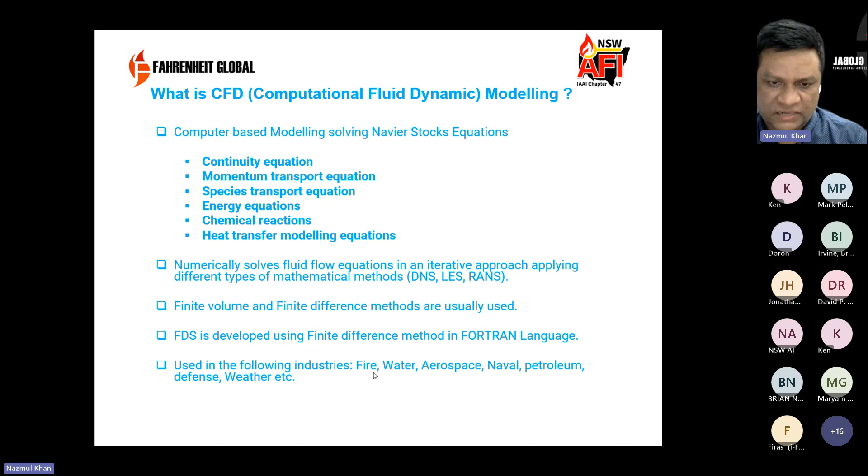Recent rulings regarding the use of computer fire modeling - I think you guys probably know that there are controversies. Some people are happy to use computer fire modeling, and some are not. They argue different types and raise different questions about accuracy and other things.

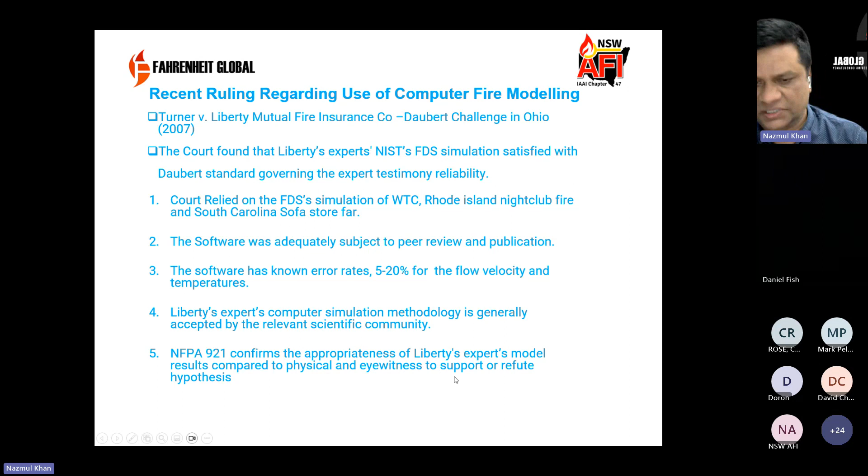Origin of fire is one of the important areas that I believe whenever we are going for an investigation of a fire. As NFPA 921 confirms, we need to find the area of origin before the cause can be properly evaluated.

In this model, Gregory is a full-time professor and professional fire and explosion analyst. He studied both experimental and simulation approaches.

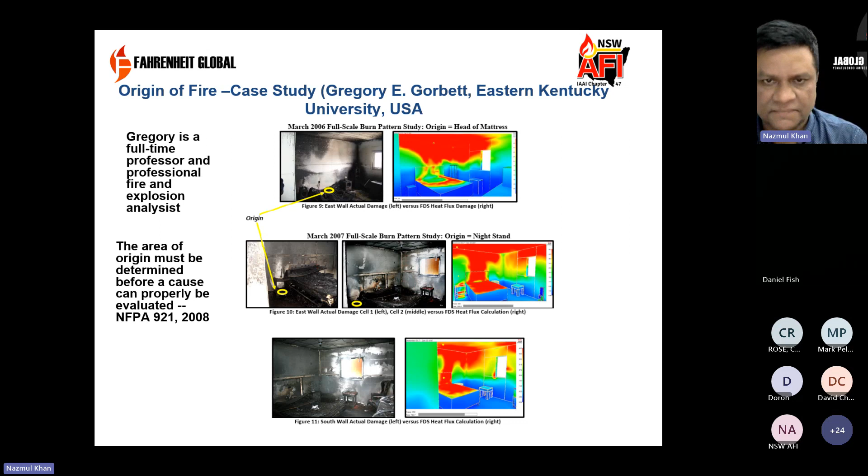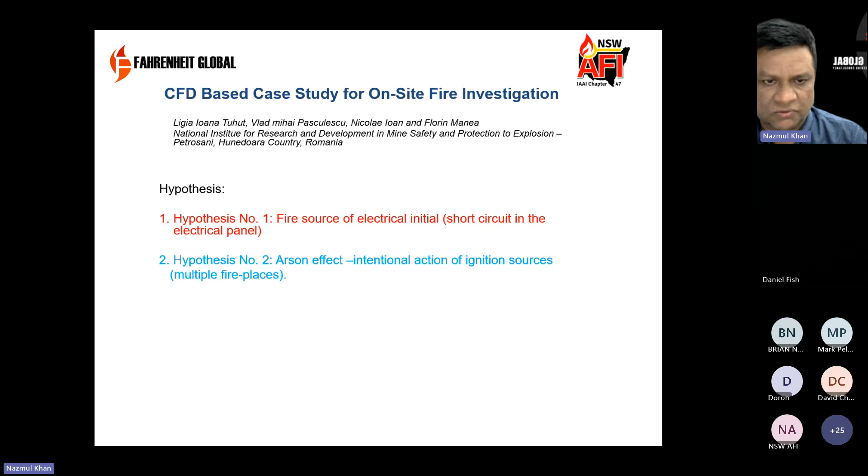Another case study I want to present as a hypothesis: one hypothesis is fire sourced from electrical initiation, or fire initiated from arson, meaning intentional ignition with multiple fire places. Let's see how it looks.

These figures are taken from a journal article showing electrical initiation of fire. The fire is initiated through the attic interior, and subsequently, as shown in A, B, C, D, we see the progress of the fire's growth and spread, ultimately reaching the final figures. This area did not actually spread further, as the fire spread in the middle of the area. This is the scenario based on electrical initiation of fire.

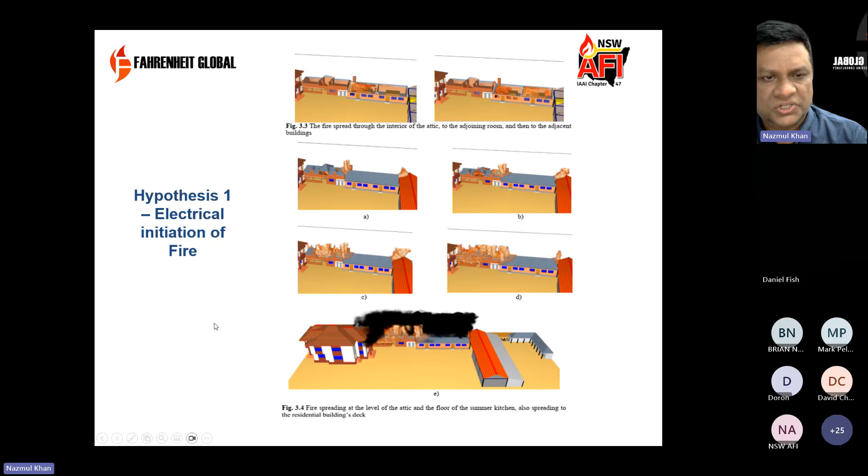Let's see another scenario with arson initiation. Arson usually uses an accelerant, like liquid phase fuels. Here we see multiple outbreaks due to deliberate burning of combustible walls from these regions, and the lighting of the wooden wall of the annex, from which the fire is originating.

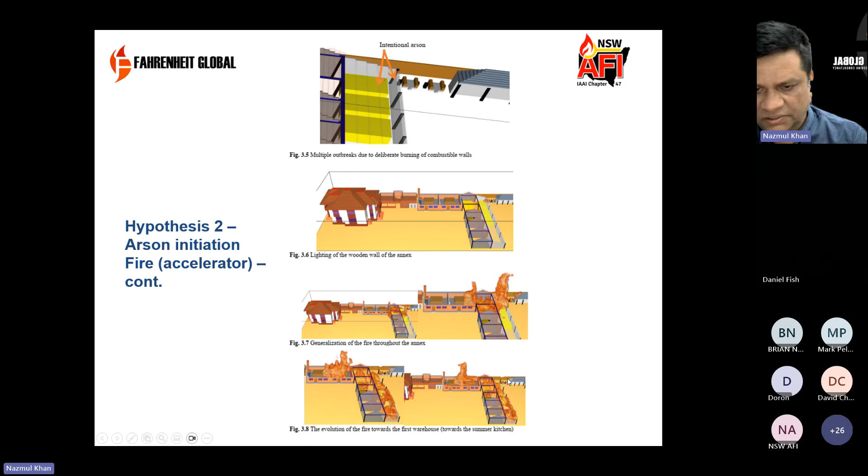We can see the generalization of the fire throughout the annex, progressing to the left side area. In this figure we see it continue, and finally the fire spreads over these areas, up to the annex, causing damage to the workshop and storage spaces of that area. Here we see the final scenario for that fire.

In the real fire, it was found that the damage looked similar to that scenario, so we can generally assume it was likely due to arson initiation of fire. This is evidence from a real fire compared with the FDS simulations, which gives us believable tools so we can establish our hypothesis.

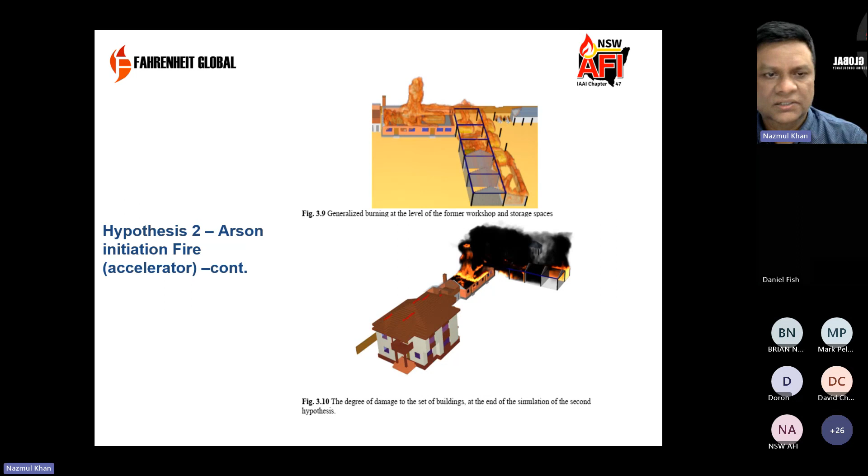CFD model in fire investigation. I've taken this from the NFPA 921 guide, which describes where we can use CFD-based fire modeling. Looking at the bullet points, where space and fuel configuration is irregular, mostly this applies to wildland fire or wildland urban interface, residential buildings near wildland or forest areas, bush-prone areas, something like this, but turbulence is a critical element.

Another point mentioned here: turbulence is very relevant to wildland fires, where very fine detail is sought, whether in big buildings, sensitive key areas of buildings, or even in wildland fires.

As I presented a bit earlier in previous slides about the World Trade Center collapse and Rhode Island nightclub fires, those fires indicate that they can be replicated by FDS.

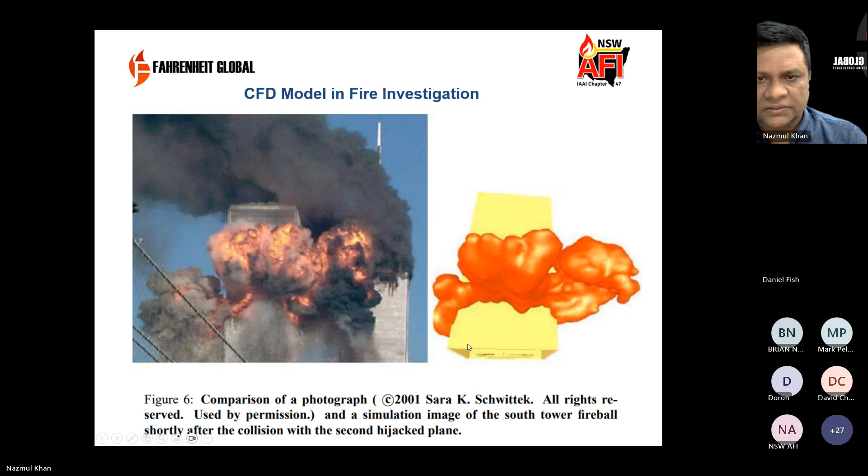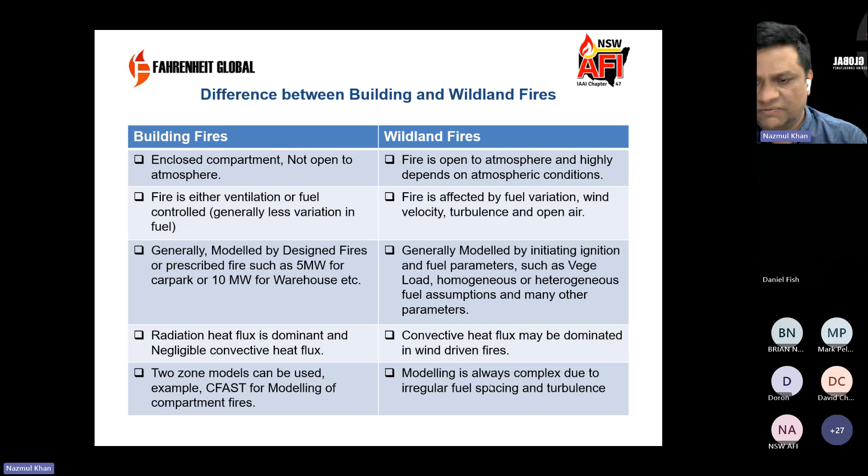Now I'm going to present my PhD work, not too much, only one slide. In my PhD at Sydney University, I did multi-phase modeling in OpenFOAM. Multi-phase means liquid phase and gas phase. Whenever we talk about multi-phase, we have to understand the plume, smoke or air is created as a gas phase, and liquid or solid, like timber or trees, is the solid phase. So modeling of this kind falls in the category of multi-phase. So in multi-phase modeling, we have to create both the gas phase and the other phases in the modeling.

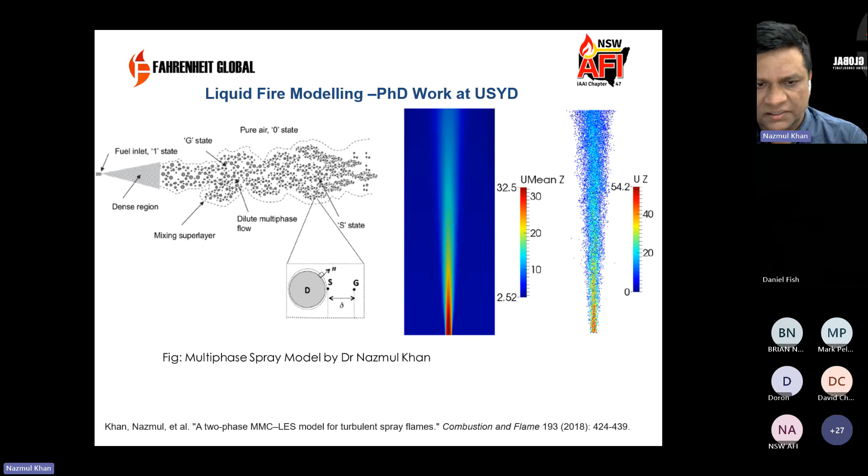Now I'm moving to the wildland fire modeling, where I did more than 4 years of work at Victoria University. It was a Bushfire CRC project initiated by Victoria University. In this presentation, I'm going to talk about grass fire modeling and also forest fire modeling. At Victoria University, we developed canopy modeling, which is a form of forest fire, and also the canopy with hills. This is not essentially the fire model, but as I said, open wildland fire is dictated by the wind flow. So when there is a hill and canopy, obviously the flow field is very complex, and that complex flow field dictates the fire rate.

Here is the grass fire model. Originally, the grass fire model was validated by Cheney et al. at CSIRO. The left side is the CSIRO experimental setup. The right side is our FDS model done at Victoria University. We can see the rate of spread is validated between the experiment and simulation. Very good. They match each other in terms of the rate of spread.

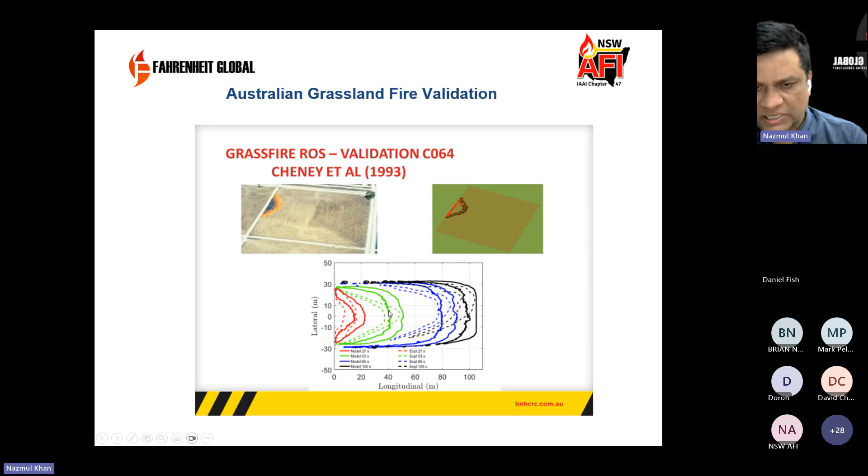Canopy modeling, as I said, canopy is a little bit hypothetical. Flow field, as you can see on the left side, there is a model, and there is a forest. Canopy model. So these equations use the leaf area indices. With the leaf area indices, we developed a tree profile, something like this. When there is airflow through the trees, there's a wind profile, something like this. So based on this, we call it the canopy drag model, which we developed at Victoria University.

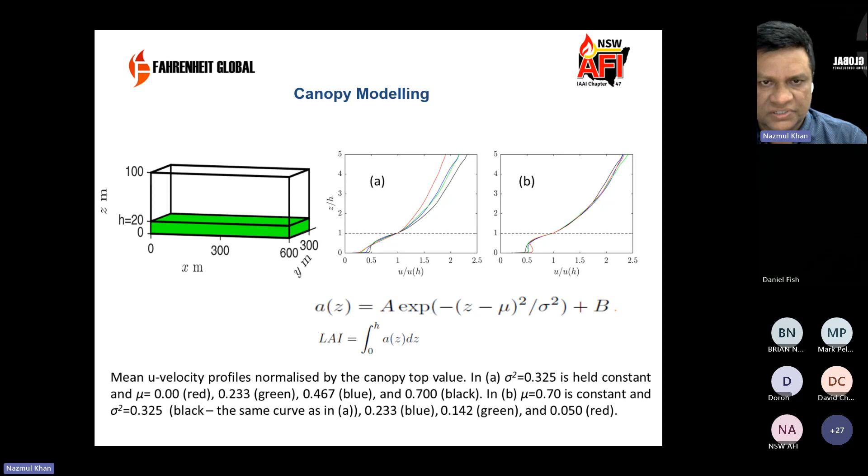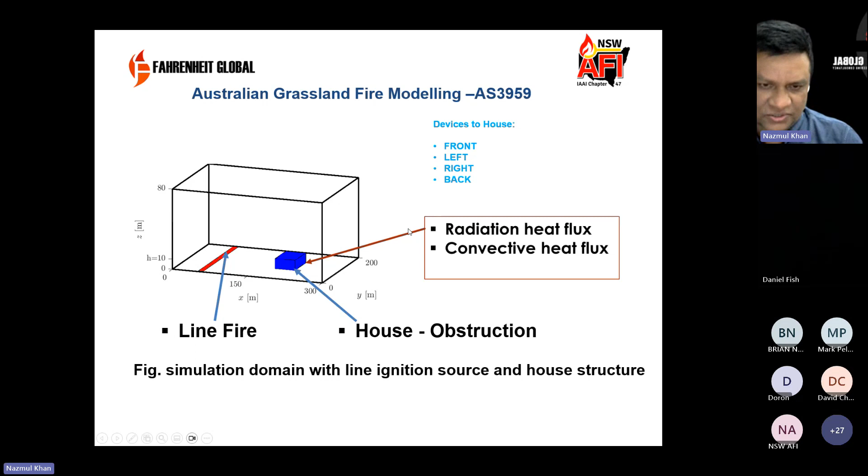Now I'm going to talk about AS3959, which is relevant to bushfire. As you can see in the model, as I said earlier, in wildland fire we usually initiate the fire by a line fire. There is a line fire here. The white area is grass. I'm not showing the grass here, but I'm showing the house as an obstruction. At the front, left, right, and back, we put some devices so that we can collect the radiation heat flux in FDS.

I'm showing one video which shows how the fire is moving. When the fire was initiated here, this is the ignition source. From the ignition, fire spreads to the surrounding grass, and the grass catches fire. With the wind velocity and combustible vegetation there, the fire is propagating. When it reaches just in front of the house, we measure how much radiation heat flux is received by the house, and we compared it with AS3959.

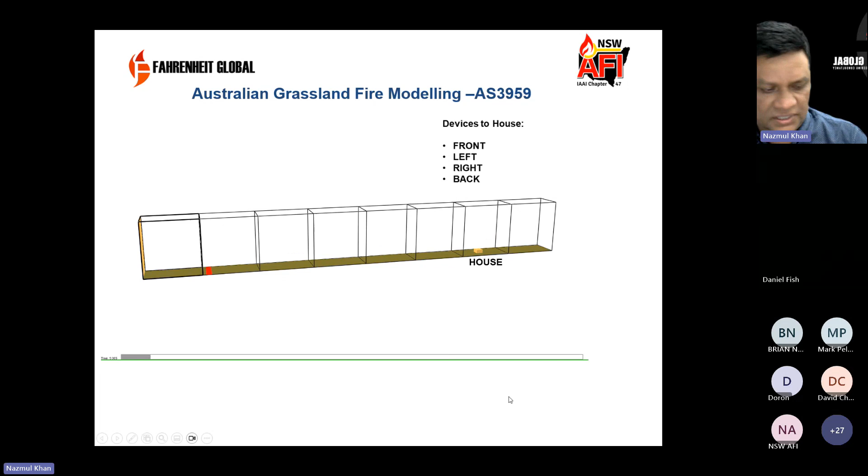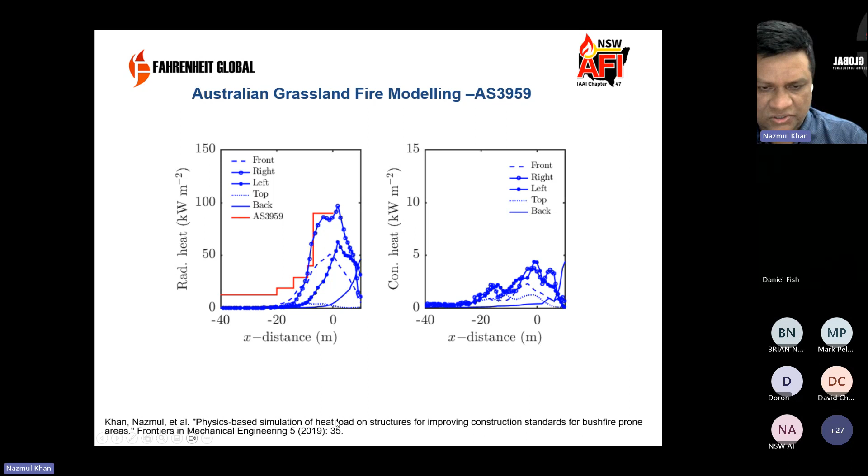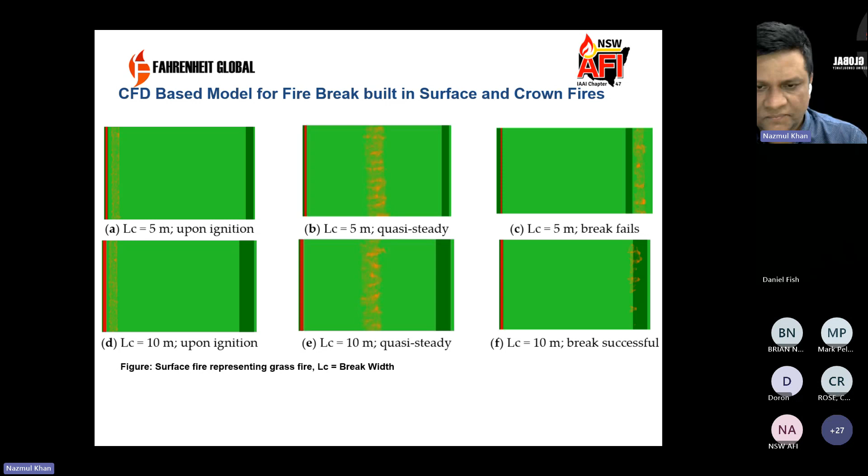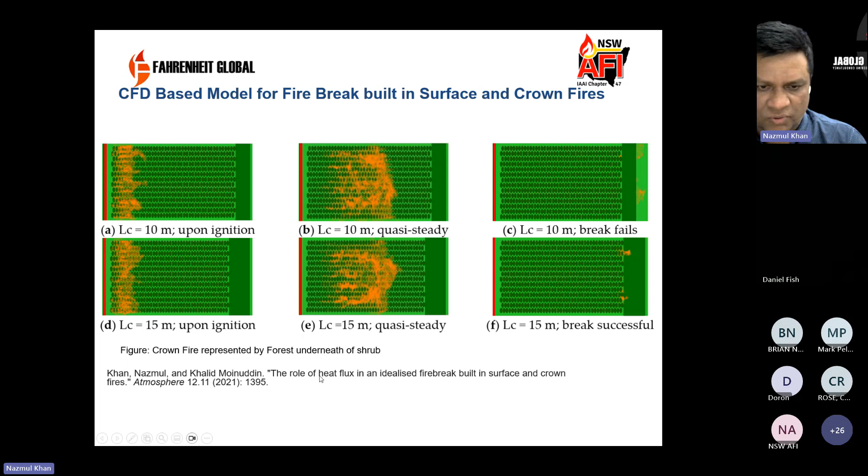This work was presented to the Australian and New Zealand fire agencies, and we wanted to show them how we can do the simulations and justify the fire break size in a forest area. It's like prescribed fire, probably you guys know about it. With the prescribed fire concept, we can clear some of the areas, even in the middle of the forest, to stop the spread of the fire. And we published one journal article. As you can see, it is open source. If anybody is interested, you can see there.

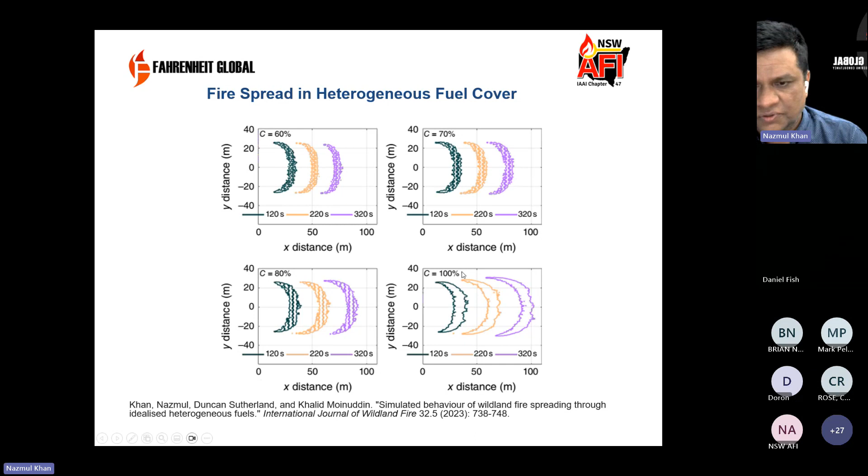Now I'm going to talk a little bit about FDS and some points if anyone is interested to work in FDS and do some simulations. As I have given the link, anybody can download FDS, and the installation is very simple. You just follow the link and you can easily install it on a Windows or Linux computer.

And there is a user guide. There is also a technical reference guide. You can easily follow them, and you can run the example cases if you want. It can be run in Windows and Linux. For Linux, usually we prefer big jobs in terms of the number of nodes. No extra cost for the open source software. But if you want to use the open source software, obviously you need some extra knowledge.

Otherwise, you have to use PyroSim, which comes with FDS inbuilt, and you can easily develop a CAD profile of a model and run simulations, but it is a subscription, a little bit costly, usually used in fire safety engineering consultancy. And open source, there is one option, Blender FDS, but I don't see it as very handy, but still it is possible in a graphical user interface.

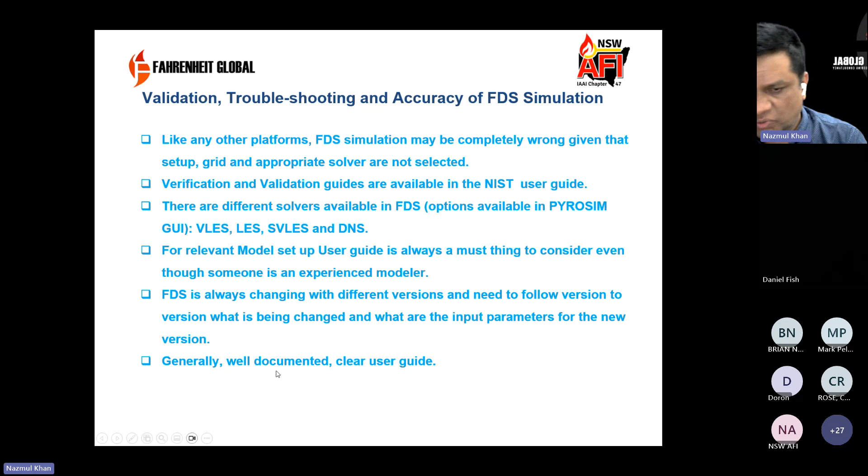Again, I should talk about some simulation results, how they are sensitive to other parameters. Generally, the grid resolution, the mesh we are using in the model, is very sensitive. Sometimes which solver I am using, atmospheric conditions, design fires, fuel-specific parameters, type of solver, all these are very influential in the simulation result.

We need to keep in mind, even though, for example, we don't do the simulations, we can hire a third party to do our simulation, but we need to understand the simulation results, and we need to understand where to put them and how to support our hypothesis.

Development of the wind profile is very complex in terms of wildland fire. There are different kinds of wind profiles, log profiles, synthetic eddy method, something like this. Numerical instability is another important thing. In modeling, numerical instability may come from different sources, maybe grid, maybe conditions, maybe fuel-specific parameters, and modelers must understand the causes of instability. There are many ways to handle, understand, and troubleshoot the problems.

And many parameters in FDS, the input parameters I'm talking about, for example ambient temperature, relative humidity, and solver, as I said, the default solver is VLES. So many things are actually default. We need to understand whenever we are running the simulations, are these default parameters applicable for my model? Are these parameters or hypotheses relevant to my work? These are the things we need to understand.

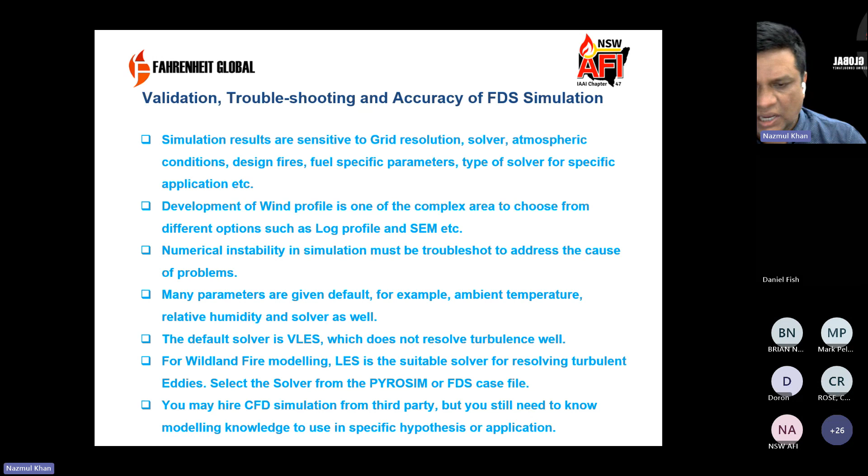And you may hire the CFD simulation from a third party, as I said. Nowadays it is available, but you still need some modeling knowledge for specific hypotheses or applications, which might be handy.